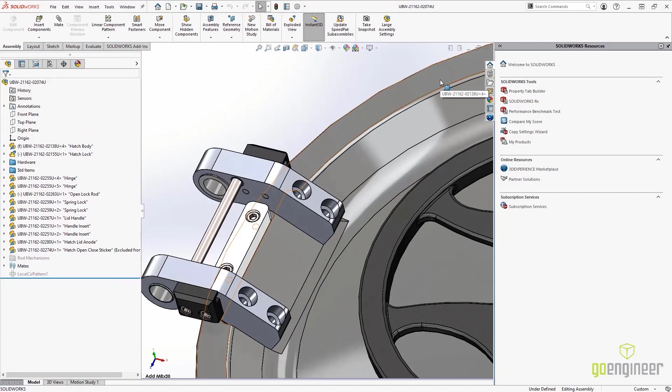Eric is adding some finishing touches to this design by adding fasteners from SOLIDWORKS Toolbox. We toggle over the drawing and make sure everything is refreshed, and we're good to go. The 3DEXPERIENCE platform app is displayed directly in the SOLIDWORKS task pane. Here we can see easily the status of in-work files.

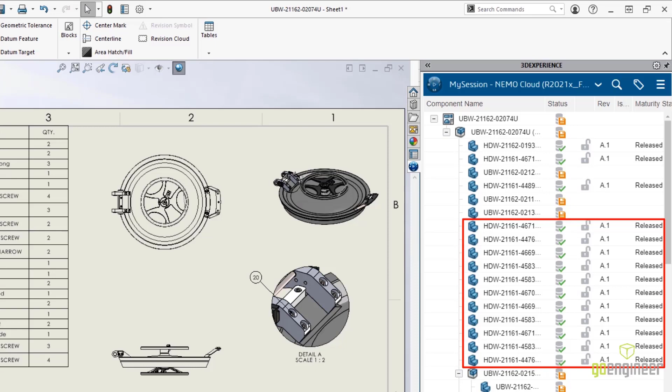And the toolbox components automatically get cataloged and released so that all users can share their components online. The Save dialog shows us exactly which items require an update. We can also assign any item to a bookmark to more readily find it later. It's a great tool that enables us to sift through many components.

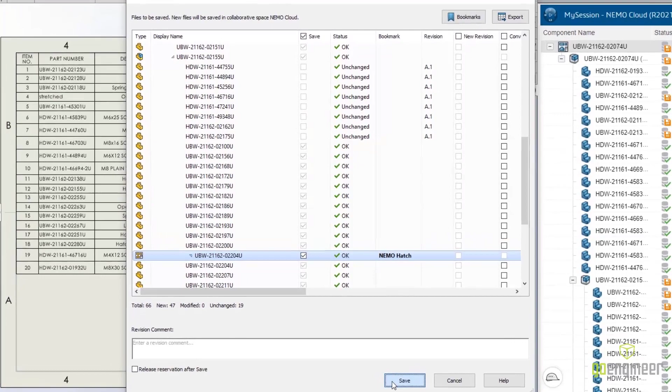Only the new or changed items will be uploaded to the cloud. This saves a lot of time and network bandwidth. Lifecycle operations are a critical step. We have easy access to these operations from directly within the SOLIDWORKS task pane. As he releases the item, this will help avoid accidental overwrites.

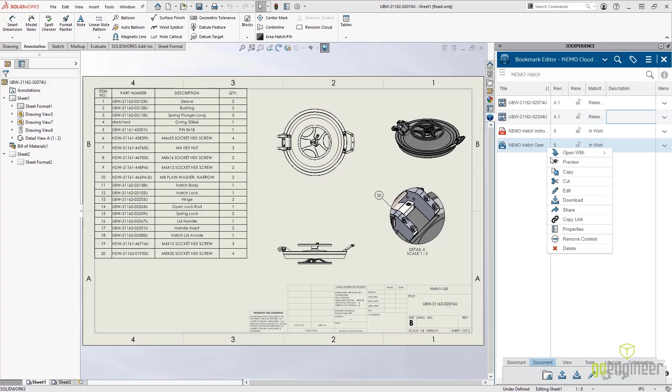And while he's at it, we're going to switch over to the Bookmarks tab and switch the related drawings for the part and assembly to released as well. Here we'll add a related PDF and a SOLIDWORKS Composer file. And in a workflow smooth as silk, most documents are able to be previewed directly within the SOLIDWORKS task pane, including this Composer document.

And one of my top 5 favorites, the automated batch save, enabling us to upload local design folders easily, one at a time, or multiples, to designated cloud spaces.

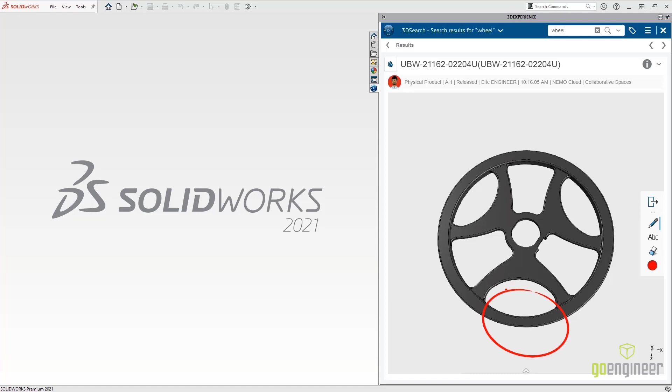With cloud-based PDM, collaboration is key. Here Debbie logs in and gets a message from Eric about a redesign request. A simple search, and she can access the hand wheel. Using the integrated 3D annotation tools, Debbie quickly sketches out some new concepts. And then from here, she quickly opens the part directly in SOLIDWORKS.

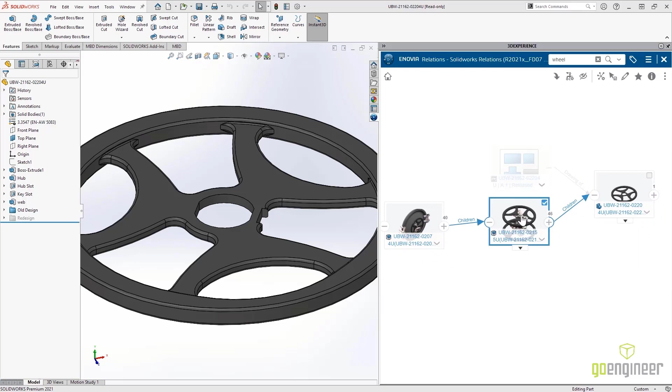Before she makes any design changes, it's best to do a where used search. This will give us an idea of the trickle effect of our changes. Here we can see there's a sub-assembly inside the top assembly. So she'll start there. With the design open in SOLIDWORKS, we can see that this version is released. So in order to make changes, we have to create a new revision.

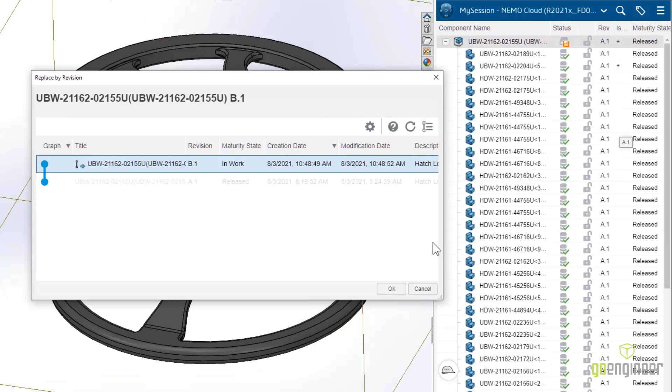With the part and sub-assembly now flagged as changed, we're going to bump those by overwriting them with the latest revision. And then to ensure nobody else is working on those files, she'll simply reserve them for herself, while not locking anyone else out of the rest of the design.

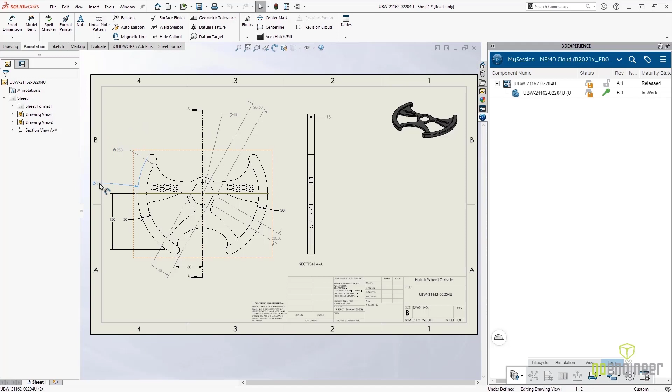With the changes made, let's go ahead and make sure that our drawings are also refreshed and updated to revision B. The shared bookmarks give us quick access to those drawings. With the changes now taking effect, we can now save the new designs to the cloud, set them to the new revision, and then to a frozen state so the designs can be reviewed.

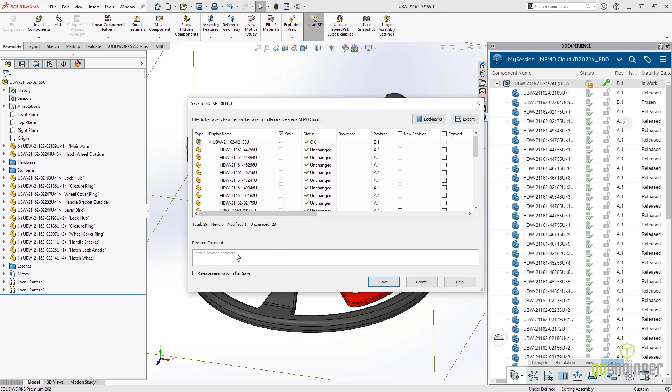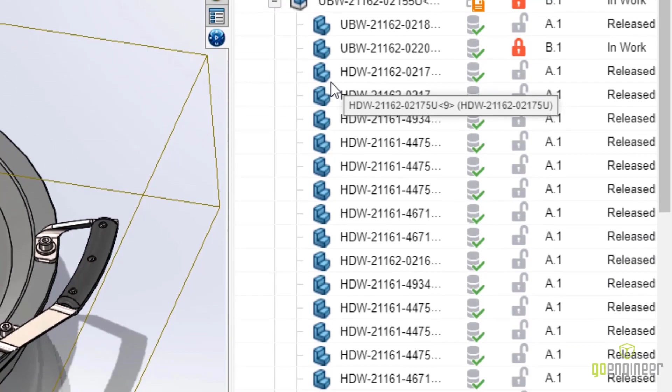She returns back to the assembly and completes it by finishing it with some new hardware. And then she uploads the finalized design to the cloud. Now Eric is working on a version of the assembly one level higher, but it's easy to see the files below him that are reserved by Debbie. He can reserve the top-level assembly and continue his work there. This modular approach allows users to design concurrently without saving over each other's progress.

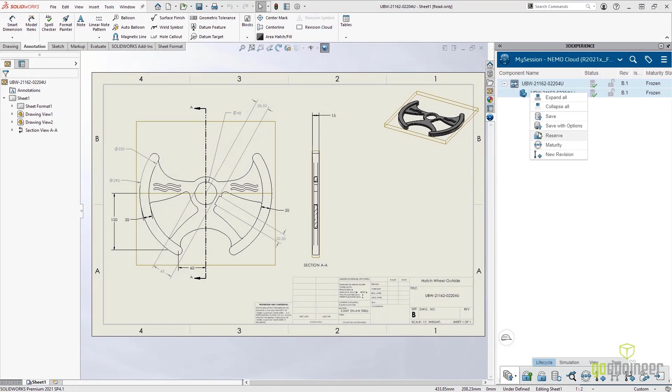As soon as Eric receives a notification that Debbie is all done, he simply needs to refresh to the latest version of the design of the files she was working on. Taking a look at the drawing of the new hatch wheel design, he likes what he sees, so he moves it to released. Back in the hatch assembly, Eric adds the linkages, and then updates and releases the top-level assembly and drawings.

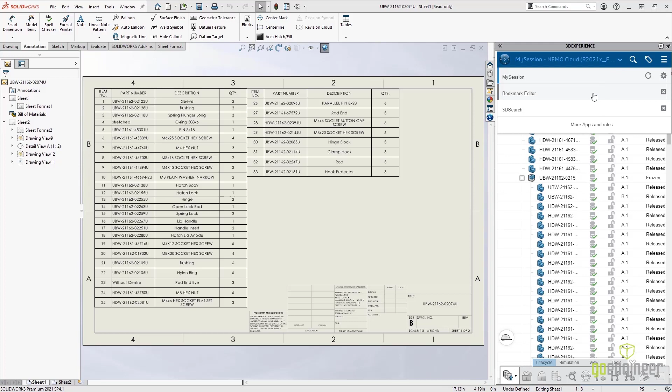Out-of-the-box cloud data management enables your team to be productive on day one. Safely store and manage your data while designing concurrently, and all while never leaving the familiar SOLIDWORKS interface.